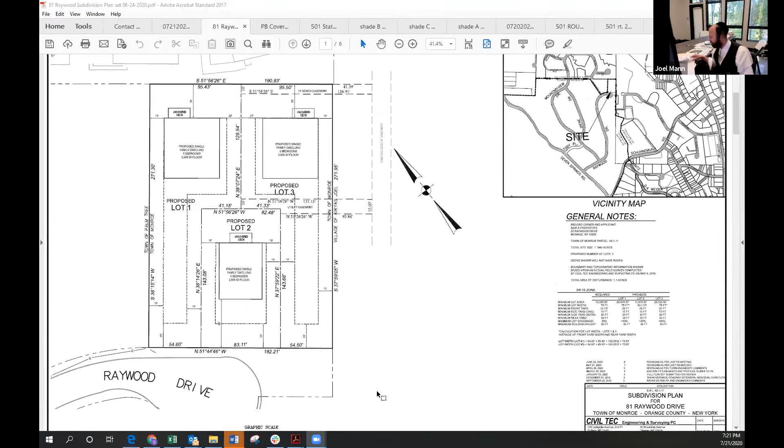Okay, so basically at the last meeting the board scheduled a public hearing for this project, and we had a couple of items, basically subject to addressing the comments from the planning board, and we did that. We resubmitted a set of plans, and they were more like technical comments, simple comments. We just received a couple days ago a new comment letter from Sean. I didn't have a chance to review that, and it's basically also regarding the easements that we are working to get. The Orange County Sewer District number 1 application has been submitted, and as soon as we get something... I actually had a meeting last week with the sewer department, they are working now on it, so we hope to get back from them something, comments or approval, soon. And that's basically it.

So why don't we just take one quick step back, Joel, and explain again what this subdivision is, how many units, where it's located, for the benefit of anybody who may be listening in for the public hearing. Okay, sure.

So this property is located on the end of the cul-de-sac of Raywood Drive. We're proposing a 3-lot subdivision. All 3 lots are compliant with the bulk table, and the proposal is to build a single-family home on each lot. In the last couple of months we went through with the planning board and did more or less a completed set of plans, including grading and utilities, and there was a lot of discussion about the trees. There's actually a letter from the Conservation Committee we'll probably need to address. So we're here basically for the public hearing to address any concerns from the public.

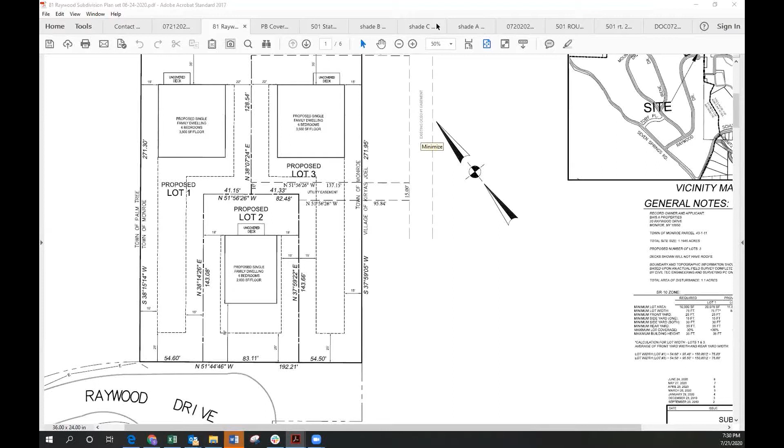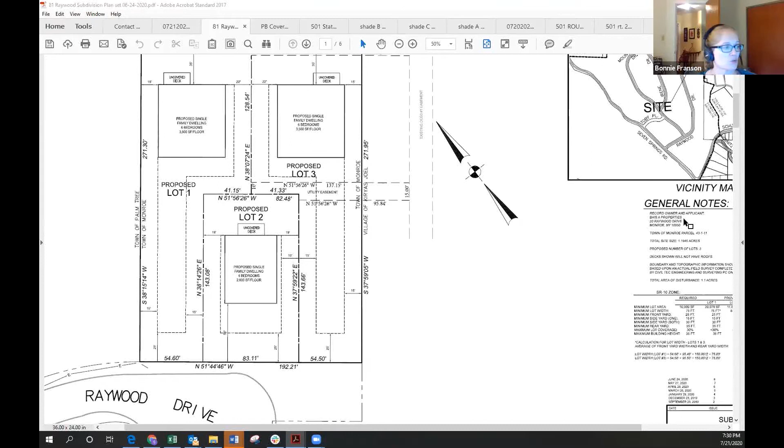So what I was saying is that in 57-21.8C, there is a section that says house relocation and standard notes are to be placed on every site plan or subdivision approved by the planning board. It includes notes that specifically state the maximum number of bedrooms is not exceeded, the maximum building footprint is not exceeded. So in terms of how many bedrooms, it's specified in the house relocation notes. Your comment went beyond that to question how many people would be within the dwelling. But at a minimum, the applicant is required to disclose how many bedrooms, on which to some extent the population is based. And that is on the plan.

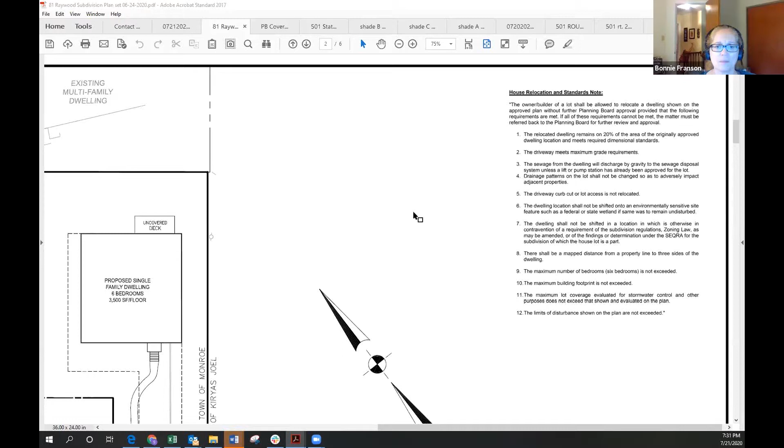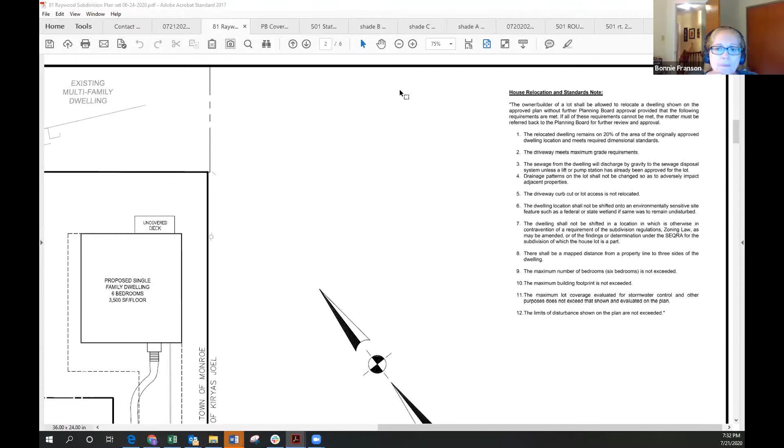So I don't know that there are any other individuals who want to make comments. Those were our two phone call-in listeners. Board members, do you have any questions with regard to the plan and what is shown? Any comments?

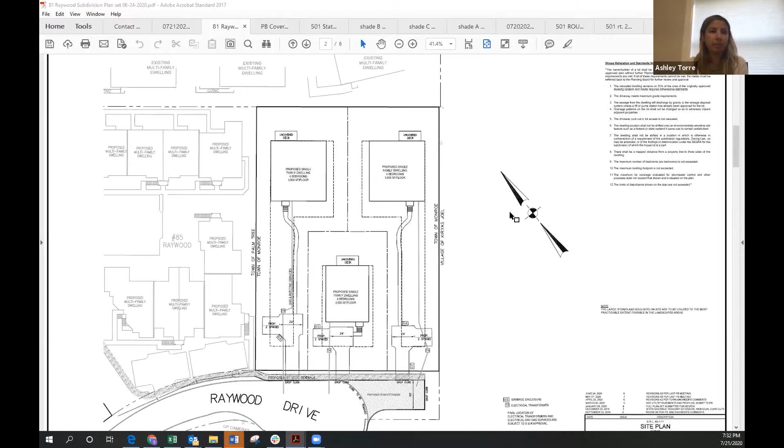Bonnie, would this be a time to comment about the Conservation Committee report? Ashley, do you want to do that as part of the public hearing or outside of it? Whichever you prefer. If you want to do it during the public hearing in the event you want additional information or further input, then you could do it that way. Okay, so John, did you have comments on that report? Yeah,

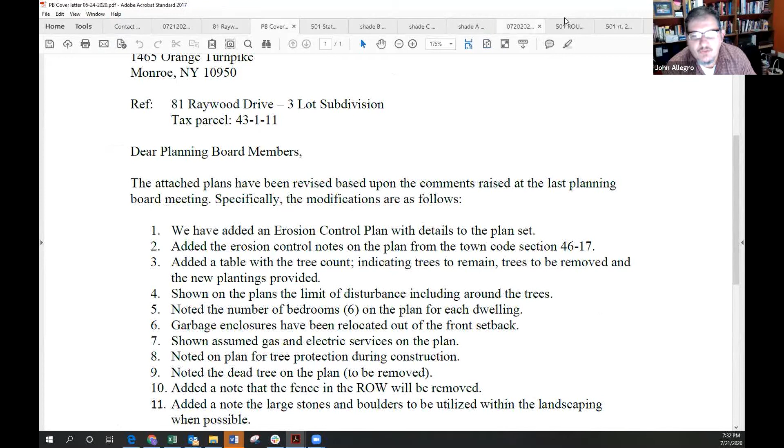I understand the statement about white pine trees, which were proposed as replacement trees or screen trees. I understand that they are high maintenance and can be rather fragile in wind and snow conditions. The only question I had was the recommendation to replace those screen trees with arborvitaes. They can end up getting destroyed by deer in no time. So maybe if there's another alternative evergreen tree that doesn't necessarily have to grow so quickly, but wouldn't be deer food - something that's deer resistant.

Ward, are you still on? I'm back, I think I'm back on. As far as the trees, the deer are a problem. I agree with John, they're a problem with white pine. They're a problem with practically every tree in existence. The thing is, you take advantage of the topography on this. This is on a slope, so deer can only reach up about 6 feet and eat. They can jump 10 or 12 feet, but they can't eat while jumping. So on a slope like that, even if you lose 5 feet of coverage, you won't see it - your tree will grow up. It's less maintenance. With white pines, what happens is they grow 6 feet a year. If you don't prune them once a year, in about 10 years the bottom branches will thin out, and people will cut them off anyway because they protrude out about 30 or 40 feet from the base. So that's not going to work.

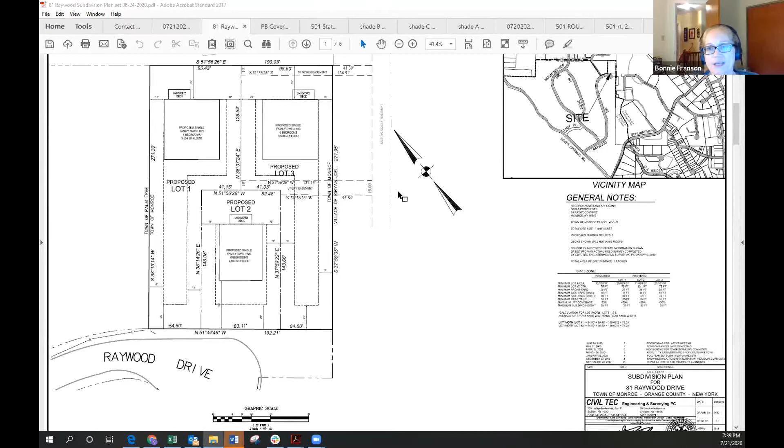It is interesting that in some forests you don't see a lot of deer foliage damage because there's enough other food mast. Correct — Bonnie, you hit the nail on the head. A lot of these trees are not the deer's first preference, but when there's nothing else around, they'll eat them.

The main thing is you can take advantage of the topo on this site. The site drops off dramatically, so the part the deer do eat, you won't even notice it, because the trees will get up there and perform their screening capabilities and you'll be fine.

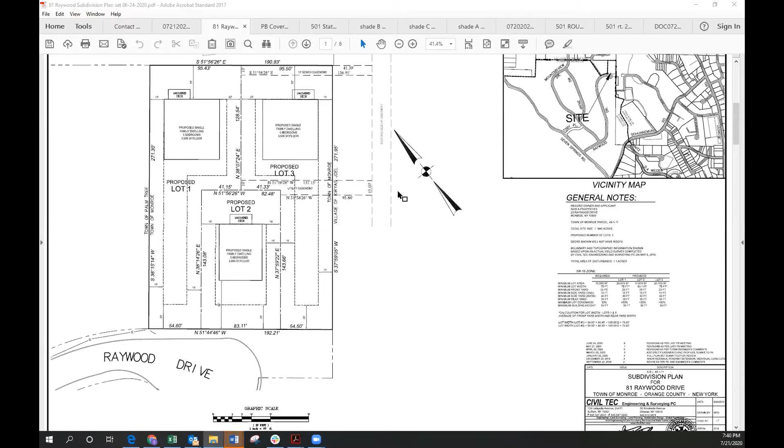So we'll take a look at your comments. I think we had also talked about possibly putting some trees at the end of Raywood Drive. Yes, I saw that in the note. Right, so where the turnaround is, that they put something there. So we'll consider your plantings.

Okay, thank you. These are the white plains — white pines. Yeah, I'd stay away from them.

They get too big. We had a project, a walk about six months ago. A new homeowner came in and bought this house, and he had 10 or 12 white pines planted 30, 40 years ago. They had taken over the entire backyard. He couldn't do anything, so he went in and had them removed, and then he got called in on the tree ordinance, so we had to go in and make recommendations. Again, these trees — if you don't maintain them once a year, and white pines, forget it.

Okay, so thank you, Ward. Bonnie, I want to stress one other thing.

In our report, we mentioned the galvanized wire used for staking those trees. I'd love to have a dollar for every tree I've seen this happen to. Planters stake the trees and wrap wire around them, then forget to remove it. They're supposed to remove the wire within a year, because if the trees haven't established themselves by then, you need to revisit the planting anyway. But they don't remove it, the tree expands, the bark grows over the wire, and then 10 or 20 years down the road a windstorm comes and the tree snaps off. That's why you should use biodegradable rope instead, because nature takes care of it within a year and the problem is solved.

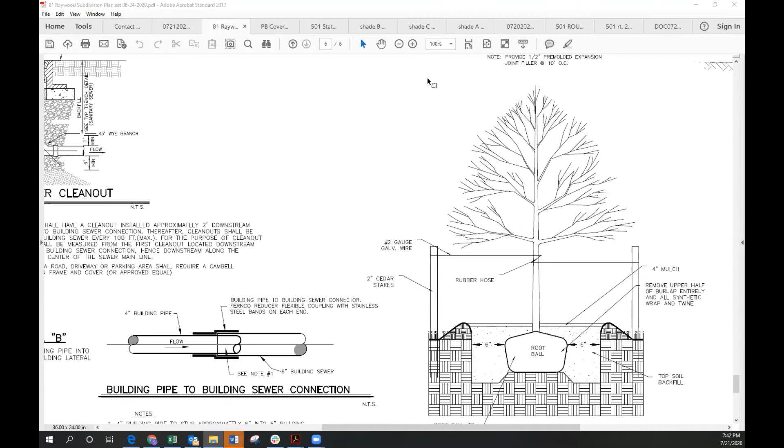Can the inspection fees for the subdivision include a requirement that someone go out a year from now to look at the plants? I'd have to look at your code. I'm pretty sure the tree law speaks about fees, though I don't know if it specifically covers inspection fees, but you do have general subdivision inspection fees. So we could look at whether you could include something like a bond that covers tree plantings and maintenance, so that someone can go out, inspect, and ensure the conditions and site details are actually followed.

Yeah, I think you'd be able to structure something like that as a condition. Okay.

So board members, do you all agree the applicant should look at the Conservation Commission's comments and take them into consideration in developing the landscaping plan? Yes, yes, I agree, yes. All right, thank you. Does anybody else from the board have comments?

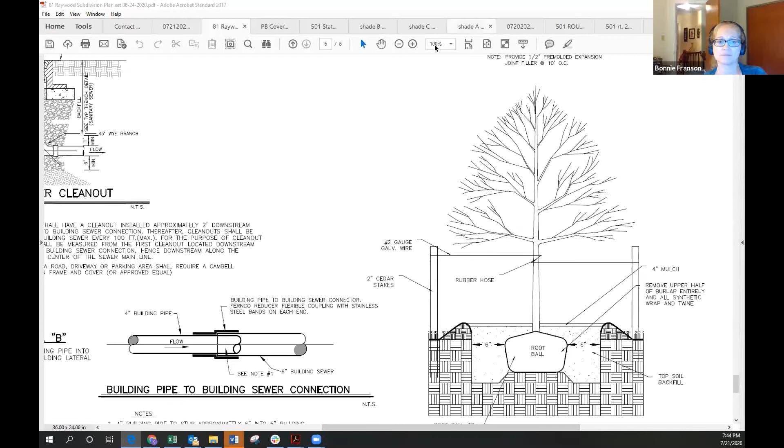I have a couple. In relation to the Conservation Committee's recommendation on tree screening, those same type of trees were used on a project in

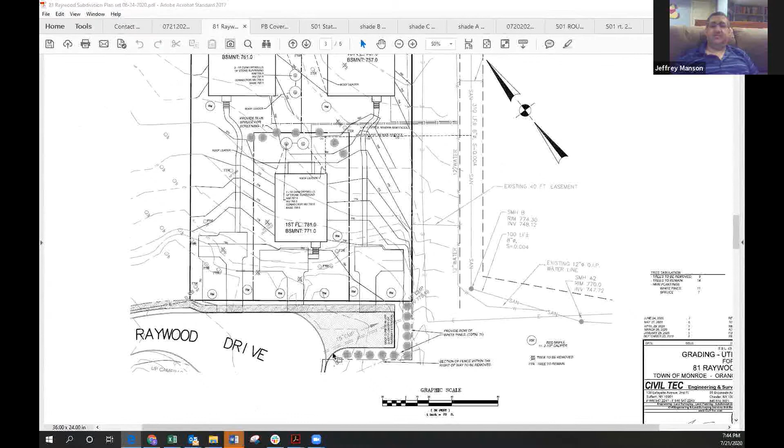the village of Harriman, where the memorial park is, right where Church Street and South Main come together in the middle of the village. There was no good screening behind that, and some trees had been taken out. The recommendation we're hearing tonight was actually what the nursery recommended in that case, done about 3 years ago. I drove by and looked at it yesterday, and it's come in terrific, doing exactly the job they were looking for. I think it would do well here too, as Ward and the Conservation Committee have recommended.

I had a chance to go out finally and take a look at the property. I noted the same thing with the large rocks, particularly at the top of the property up by Raywood Drive. One thing I wanted to recommend: where the driveway comes in on lot number 3, there are quite a few large boulders. If the applicant takes a look at 47 Raywood just up the street, they used a number of boulders that were on that property to do some interesting things, and it looks really good.

Another thought: near those boulders by the driveway, there's a big, almost cubical-shaped flat-top boulder right where the driveway is going to be. It would be nice if that could be arranged with the 3 large trees on the tree plan just southwest, or actually just due west, of the driveway, making a nice little area. It looks like someone had set up temporary seating using some stumps there, and it would be nice to preserve that and make a small seating area in that little grove of trees for future residents to enjoy, taking advantage of what's already there to do some nice landscaping on the project.

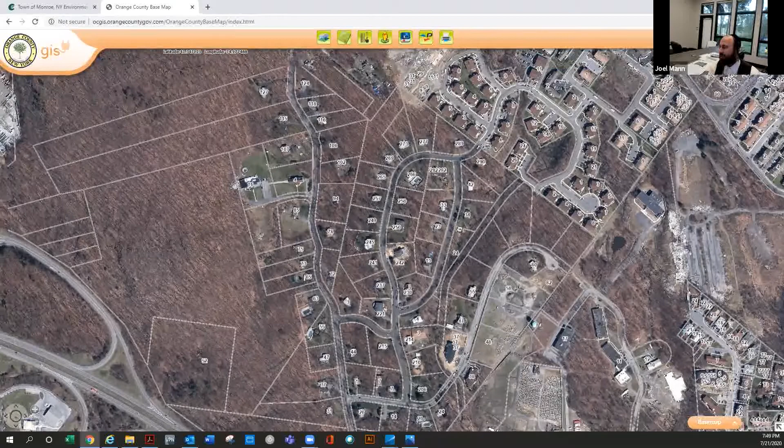So can we see this? Can you see that? Okay, it's coming up now. Yeah, I can see it. Okay, so you can see the property at the end of the cul-de-sac?

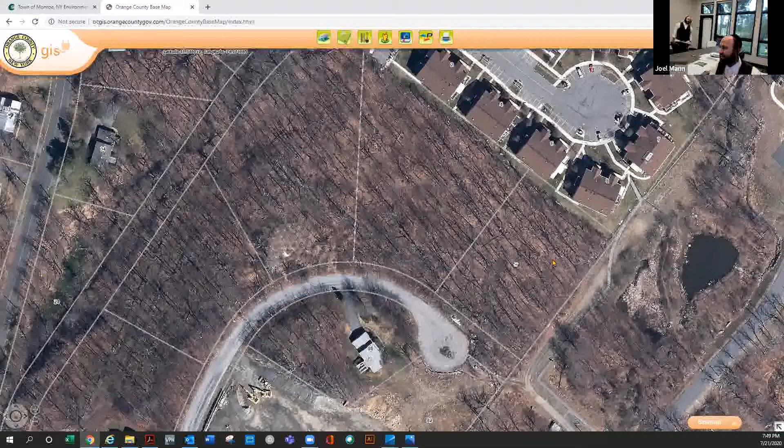We're right here, correct? Yes, and in fact there's development happening here that you can't see. And the pond is basically, if you go more to the right side, you can see it there. So basically all the water is draining down in that direction.

Oh, it's more updated. I'm going to see if Google has it more updated in the maps. It should be more updated.

There you go, so you can see some grading happening here. This building is new. I think some of this is new, and this is our site.

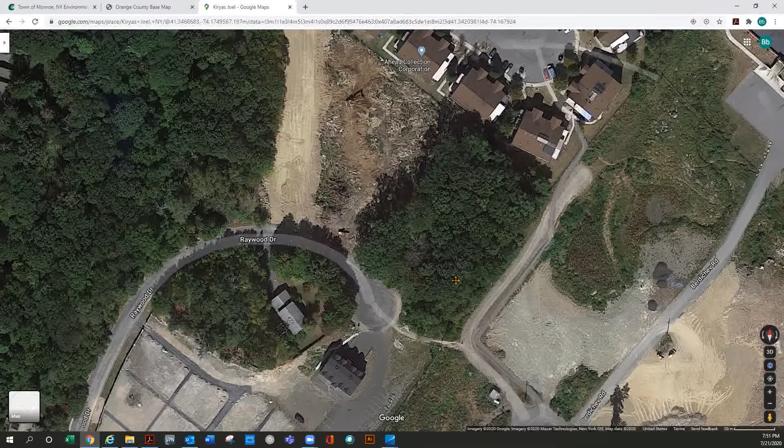Okay, I did want to show you these are the rocks I believe you were talking about, Jeff, some of the ones in the front, and they're bigger ones. Right, those are just some. We noted that it's a little hard to tell what's natural and what might have been placed there from other activities, because there's a mix of rock that almost looks like there was some blasting and they threw it there, while other rocks do look as if they're natural.

So it's kind of hard, but it would be nice to integrate that into the design. So the question is, do you want to see it specifically on the site plan, or just a note that we should implement that into the design?

Well, I think we need to be clear on the map of what can remain natural. Is the entire site being graded? If so, the rocks obviously have to be moved, and then it's a matter of showing us where you might place them, how you might locate them. It doesn't have to be a specific design, but maybe showing with notes and areas where you would place some of that natural material.

And again, if there's any trees to be preserved at all, I thought the map was showing some. Sean? You're muted. Yeah, there are some.

These trees that are labeled TTR, tree to remain, are ones that are to remain. And I believe there's a note, I can't recall where it was, about trying to utilize some of the rocks as landscaping. Right here.

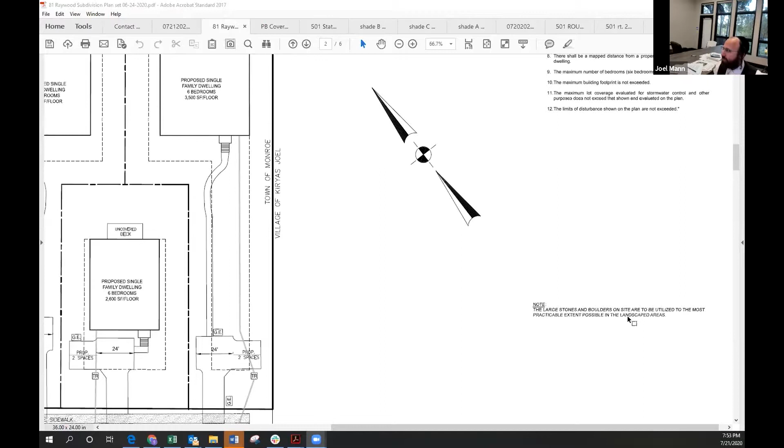Yes. So I guess then, if the board wanted something more specific or to see something visually in a landscape plan of how they'd be used, now would be the time to talk about that. Yeah, and it may be that they just call it out, perhaps on the landscape plan, where they might be able to retain some of those materials, blobby areas just showing generally where that could happen.

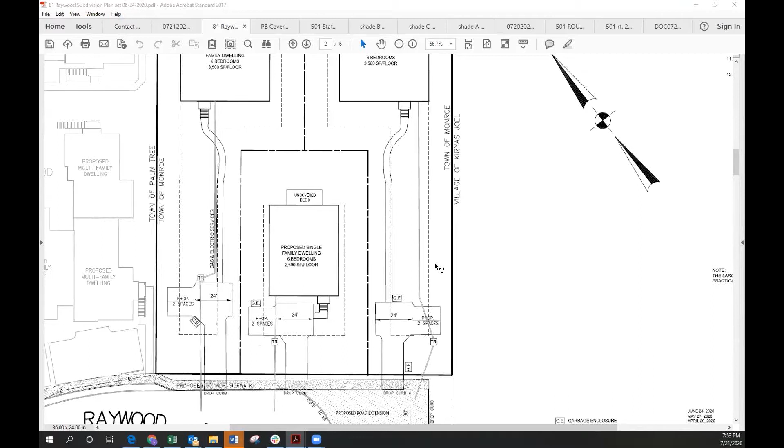Okay, I will show on sheet 2 or 3 the areas that we think we can keep as those areas.

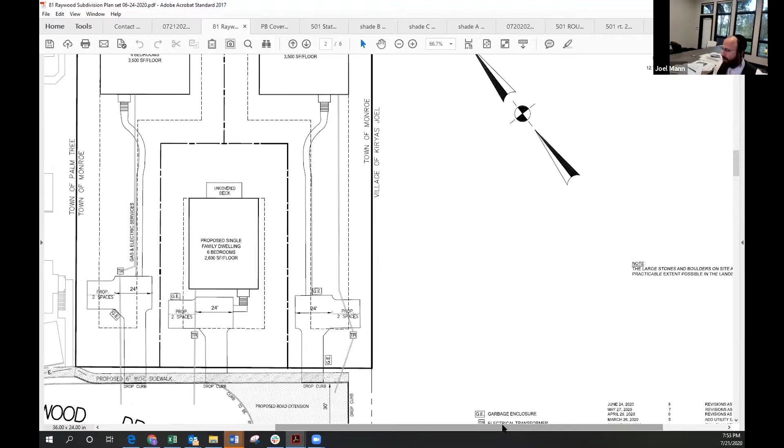No problem. I want to go back one second to Jeff's question about the drainage. So basically, we saw the surroundings, and the second thing is this property is over an acre, and the engineer provided a SWPPP, and we have on-site detention. There is a couple pits on each property, basically taking in the additional impervious areas.

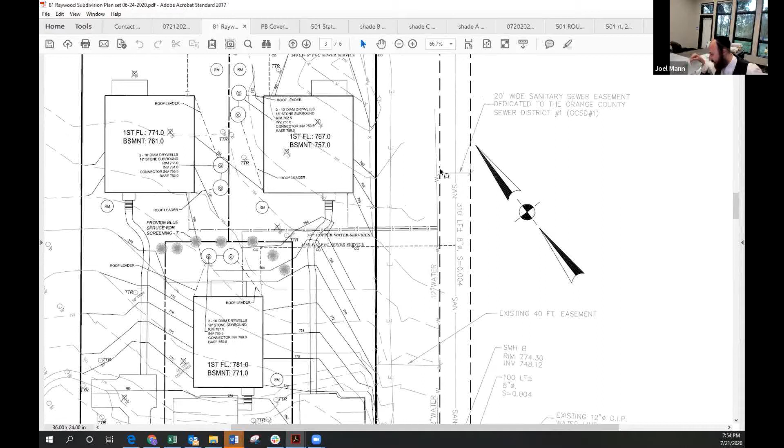I have a question, Joel. What kind of pit is it on the property? I see it says roof leader. Sorry, it's dry wells, wherever it's dry wells, there is. Oh, so they're underground dry wells. Yeah, okay, thank you.

Anybody else have questions? Sean, do you want to go through some of your comments?

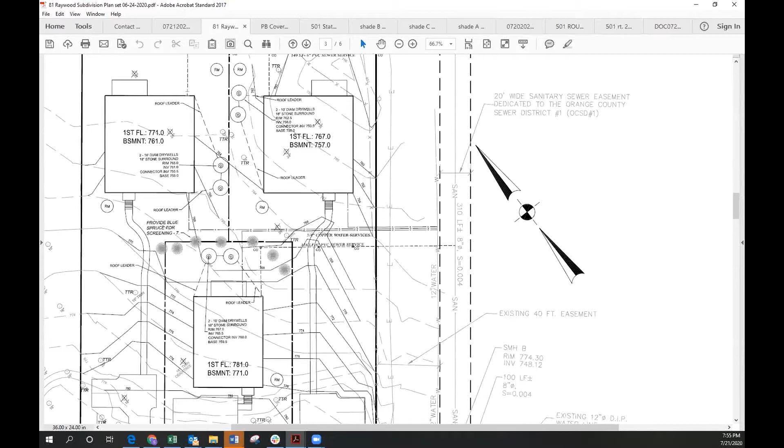Bonnie, yes, Noreen, I just sent you a text. I don't know whether you want to see if I should ask the question. No, I'm looking it up myself, but okay.

I'll raise it now. Joel, you make reference to this property being 81 Raywood Drive. But if we look at the property, it's 81. The SBL, when we look it up online as far as the property information, there doesn't appear to be a number assigned to it. Right, actually I just recently noted that, and I'm not sure from where I got this number. I believe I did it because across the street is 80 or something like that. I think it's just, I don't know that we changed the application name at this point, but it doesn't appear to have a number yet assigned to it for 911 purposes.

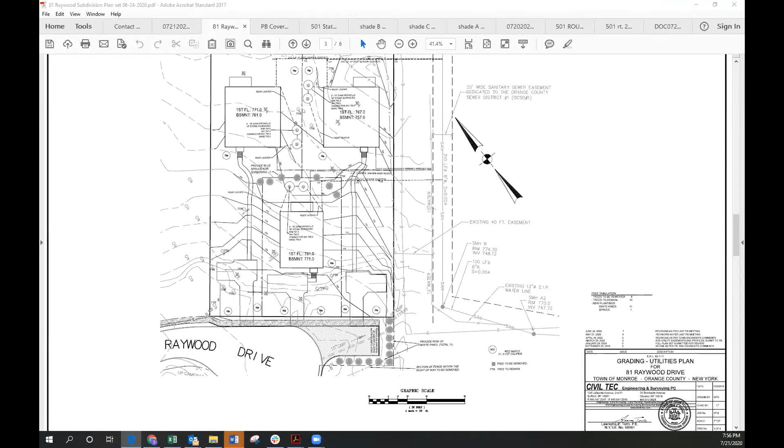Do you want me to change the application and the plans, basically all the cover sheets, whatever, all the title blocks? It should just say Raywood Drive without the address, correct?

Ashley, what are your thoughts? Are there any? Yeah, I think that makes sense because I think it'd be confusing if the 81 is kept on there if it's not actually the address for the property. Okay, that shouldn't be a big deal. We'll take care of that. Very good.

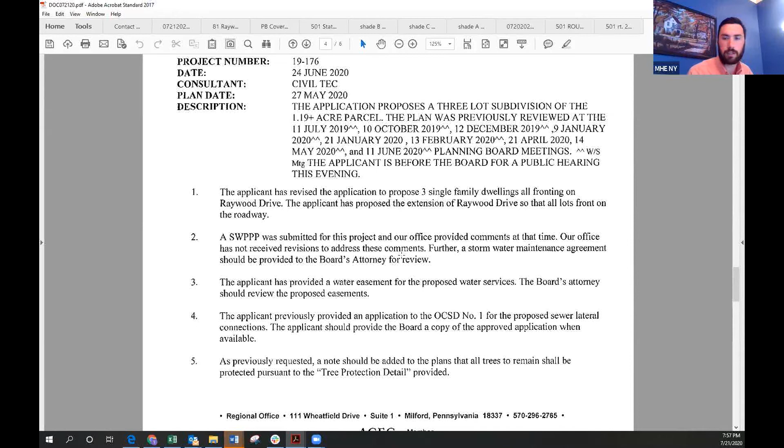Okay, Sean? A lot of these are same comments as before, such as the water easements and the sewer laterals, just kind of reminders for any potential conditional approval. One thing, we did provide the SWPPP comments. I didn't see a revised SWPPP, but that'll have to be addressed prior to stamping of the plans.

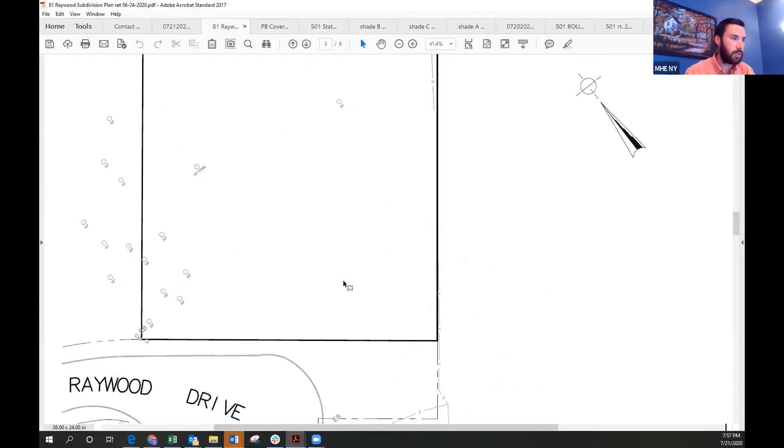Previously I had suggested that a note be added to the plans that whatever trees are going to remain be labeled to be protected, for the detail that was provided right here, the tree protection detail, just to be able to tie the detail to the locations on the plans.

Previously the highway superintendent had requested both the chain link fence be removed that's located within the right-of-way. I did see a note to that effect. However he also requested that a note be added that the street trees proposed within the right-of-way be maintained by the homeowners. I didn't see that note.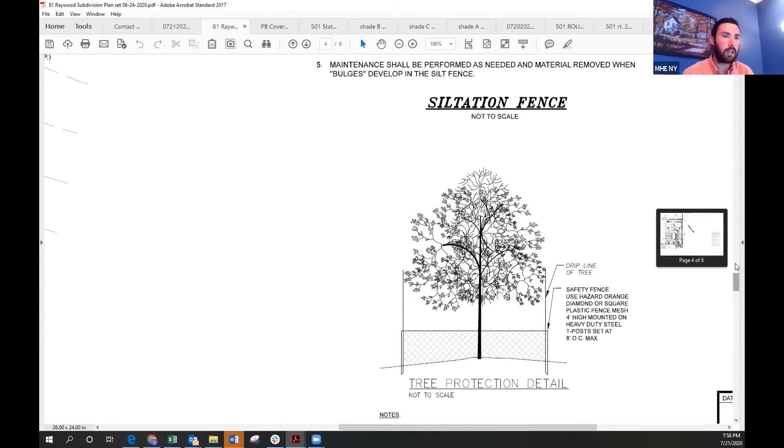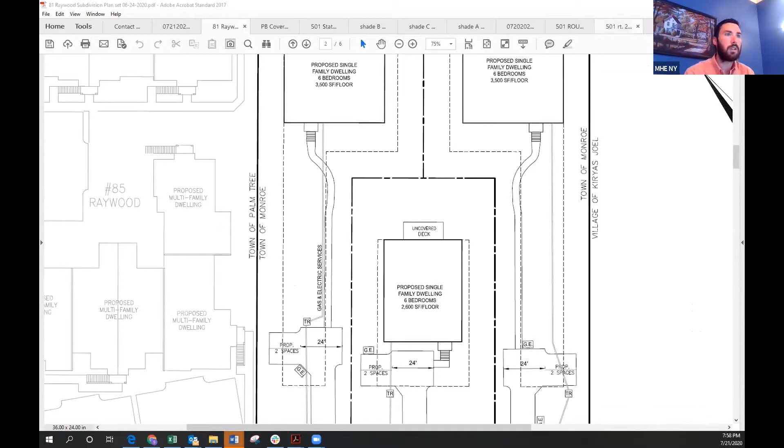Number 7, I think it was brought to the attention by one of the board members that the utility lines, the gas and the electric, try to keep those as close to the proposed sidewalks as possible, especially for lots 1 and 3, to try to eliminate the disturbance and trenching to each of the houses. I see they did a good job doing that for lot number 1. I suggested that lot number 3 could maybe be a little bit closer. And we already talked about the comments by the Monroe's Conservation Commission. That's all I have.

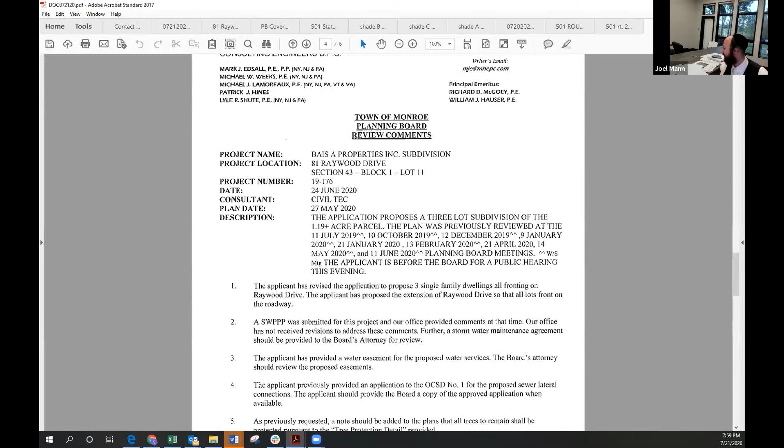Okay, thank you. I have a question regarding comment number 6. On this plan, the way the subdivision has been proposed, there's no plan to do any homeowner association. So the question is, should we do just a homeowner association just to maintain the trees in this area, or is there any other way to put responsibility on the lot owners?

All the lots are self-maintained. The drainage is, everyone has the self-drainage. They have the sewer, the water lines, everything is separate. The driveways, so there's no common usage on these 3 lots.

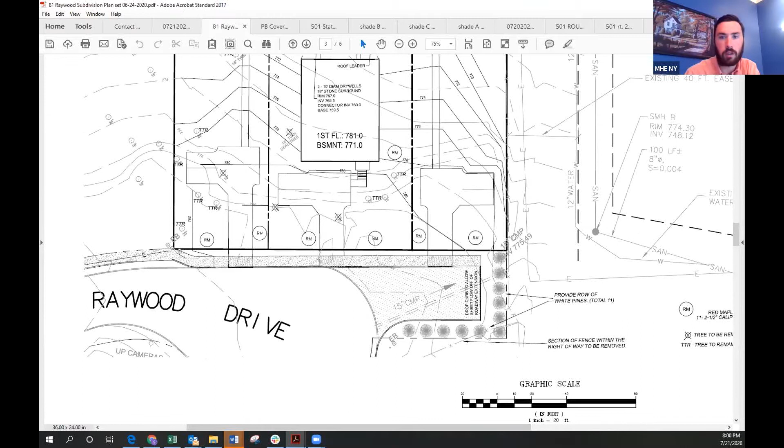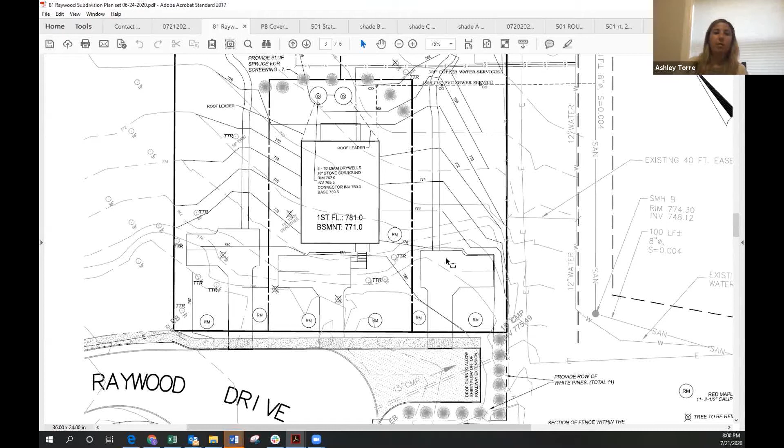Yeah, I'm not sure, maybe Ashley would know better, if that can simply just be a note on the plan. Does there need to be a homeowners association to maintain those trees? There doesn't have to be a homeowners association, but it would have to be, and I'll have to think about the best way to really accomplish that, but either through some sort of deed restriction and some kind of agreement that would be filed with the county, maybe that would cover these 3, if it wasn't going to be just on one person, which really depends. It might be easier, as far as the town's purposes, to make just one person responsible, and then however the 3 lots want to work it out amongst them, if they're going to share the responsibility, that's up to them. But for the planning board's purposes, I think it would just be a requirement that's enforceable to make sure those trees are maintained by at least one of the homeowners. Ashley, could they be tied to the stormwater maintenance agreement somehow?

So there's going to be a stormwater maintenance agreement. Is it going to cover the entire site? Each lot, I was going to actually ask about that. Were we going to have a district? We were going to have dry wells on each lot, so they would be maintained by the homeowner.

Would your stormwater maintenance agreement be something between the homeowners, or just something that allowed the town to come in if there was a problem with maintenance? Since each of the dry wells are on the respective lots and only treating each individual lot, in my opinion each lot can maintain their own. I'm not sure if a standard agreement would include the town being able to get on site to maintain it if it wasn't maintained.

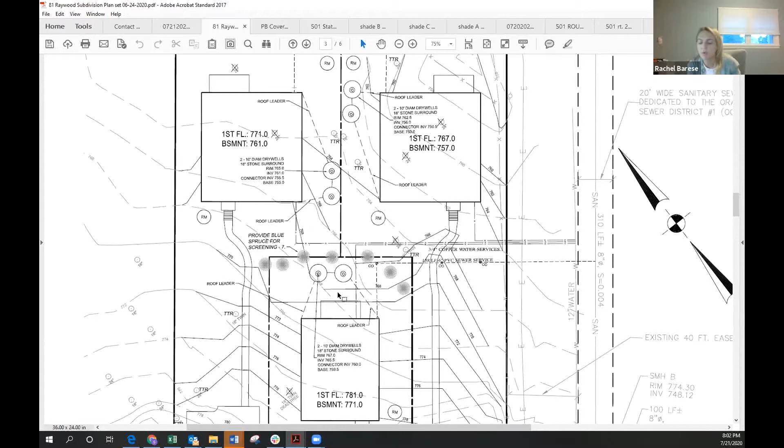Okay, because I just didn't know what kind of agreement you were looking for, since it's not going to be between the lots. So typically it would — I don't know if Bonnie knows whether Monroe has a form agreement or something, but I know typically the municipality will have that right, but not the obligation to go in and maintain stormwater.

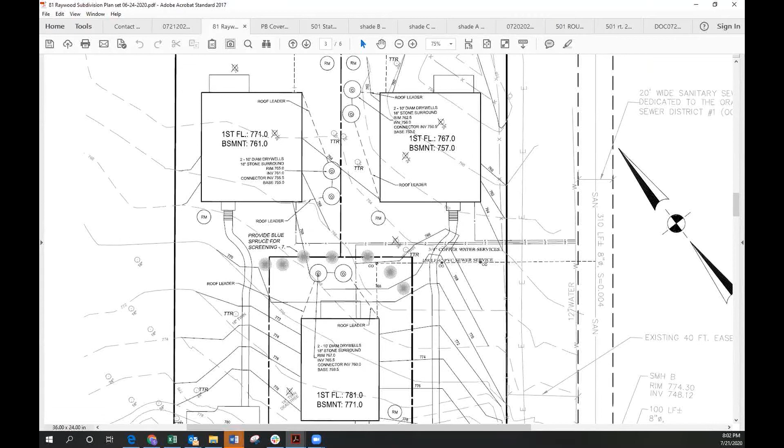That's what I've seen in other places. I would check — I was wondering, since the town does create drainage districts, whether in as much as it's a small subdivision they would want to create a district for this or not.

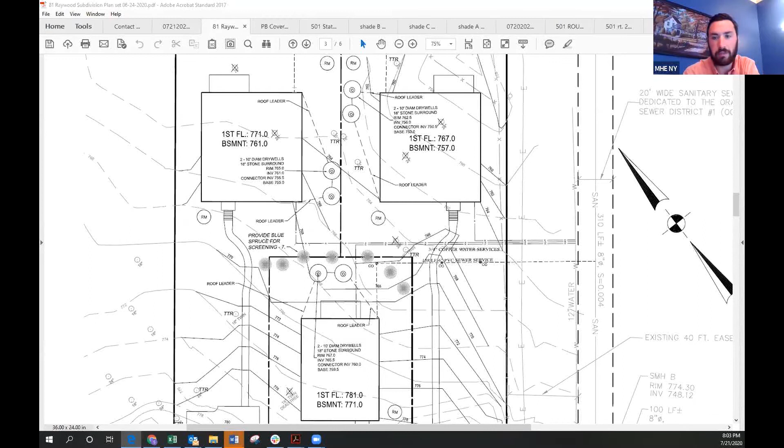I would suggest against it since there's no shared treatment or storage. Each of the individual lots are serviced by their own dry wells, so I don't think it would be in the town's benefit to create a district for each one of those. So then it would be up to some kind of stormwater maintenance agreement, but we'd have to find out if the town wants to be able to enforce the agreement.

If there's an issue and something has to be cleaned out or maintained, or have the right to access the property in the event that they're not maintained and there's an issue with them — I think we have to ask the board that question. So that's something to follow up with. Maybe Sean, perhaps you can speak to the highway superintendent?

Sure, and he may have some insight as to what they've done for some of the smaller subdivisions in the past, although he's newer too, so ultimately we may have to go back to the town board. Yeah, I'll also ask Mark how it's been done in the past.

Okay, how far have we gotten with Eagle View? What's our setup there on Lakes Road, from a stormwater maintenance perspective? Off the top of my head, I don't recall. Okay, I was going to say that might be one to consider, but okay, we'll follow up.

Any other questions? Jeff? Comments? I'm good. You're good? Anybody else? Pat or Lisa or Jason or John? You're good? I'm good. All good. Nope, alright.

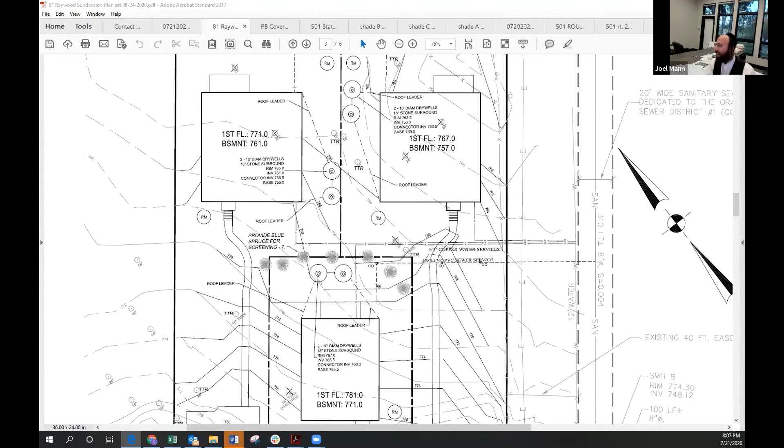I think let's close the public hearing next month, and together with that we'll basically approve it. Anyway, I guess you'll keep the public hearing open to get these additional comments and information. Is that fair to say, Ashley? I think so. I did have a couple of comments too, I could go over quickly.

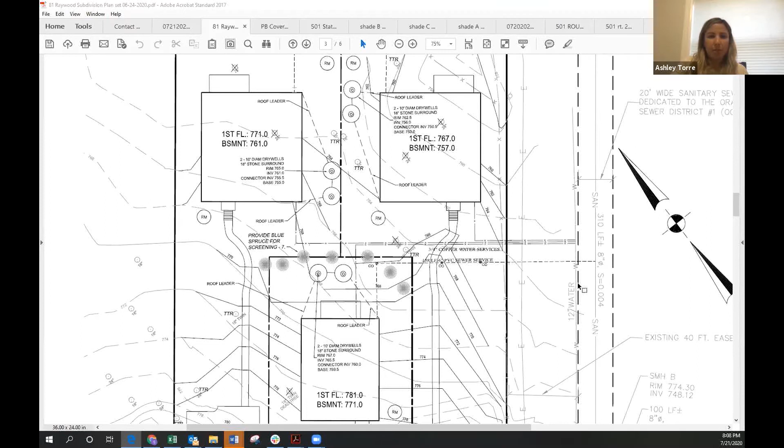Sean, if you have sheet number 2 up there. On lot number 3, it still shows the garbage enclosure in the setback. It shows one of them's been moved back, but I think it left in error, the one also in the front. For lot number 2, if you could give the distance from the side yard lot line between the side yard and the garbage enclosure, because it can't be less than 5 feet, just to confirm that.

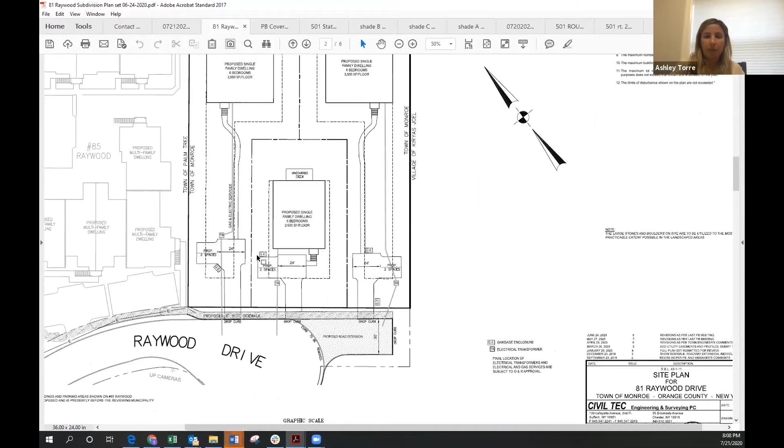The soil erosion and sediment control notes on drawing number 4 were missing some of the notes from section 4617B. You were specifically missing sub 5 through sub 7.

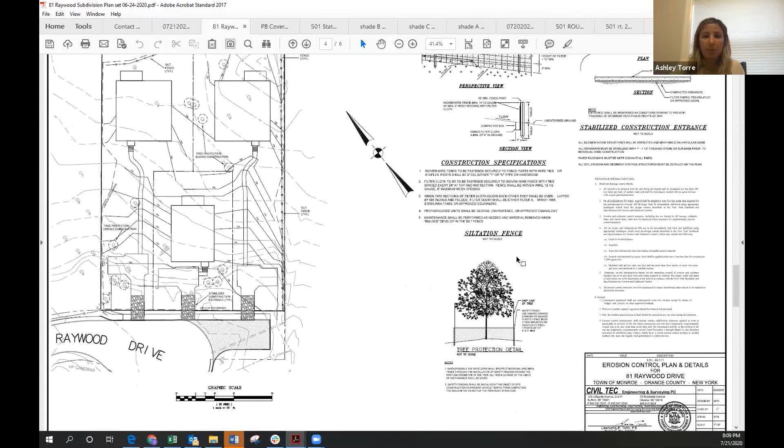We talked about the trees. One of the things I noted, the tree protection detail states it should be a requirement, but it states 'when possible.' That should really be a requirement, not just when possible, so they'll have to abide by that tree protection note.

You're proposing to remove 8 trees and add 7, plus the trees along Raywood Drive. The tree law requires trees to be replaced on a 1-to-1 basis, or on a basis acceptable to the planning board, so we just want to make sure the planning board is agreeable to what's proposed, removing 8 and replacing 7.

The planning board will also need to discuss public improvements and whether they're required or waived, and there's a list of them in the subdivision regulations. You will also need to address recreation fees since it's new residential units. And I think we talked a little already about the tree bonding—those notes will have to be added once that's all figured out.

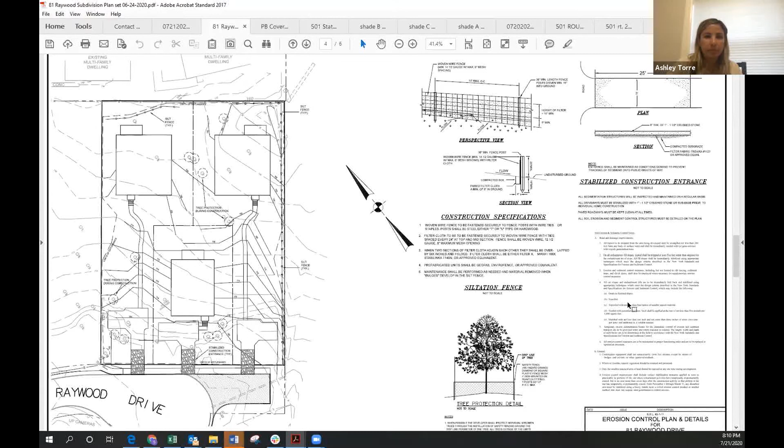Okay, is that it, Ashley? Yes, that's it. Anybody else?

No? Okay, so we're going to extend this public hearing to our regular meeting in August. And Joel, if you can follow up with the revisions, and we'll continue to move forward in the process.

Ashley, do we have to renotice, or what do we have to do to continue the public hearing? You don't need to renotice since you're announcing it at this meeting, and this meeting was noticed. Okay, do I need to pass a resolution to continue it, or do we just continue it? You could ask the board for a motion to make sure everyone's agreeable, or instead close it.

It's just a motion to continue the public hearing to the August meeting date. So I make a motion that the planning board extend this public hearing to August, is it the 18th, Noreen? Yes, it is—to the August 18th planning board meeting. May I have a second? So moved. Noreen? Was that Pat? That was Pat, thank you.

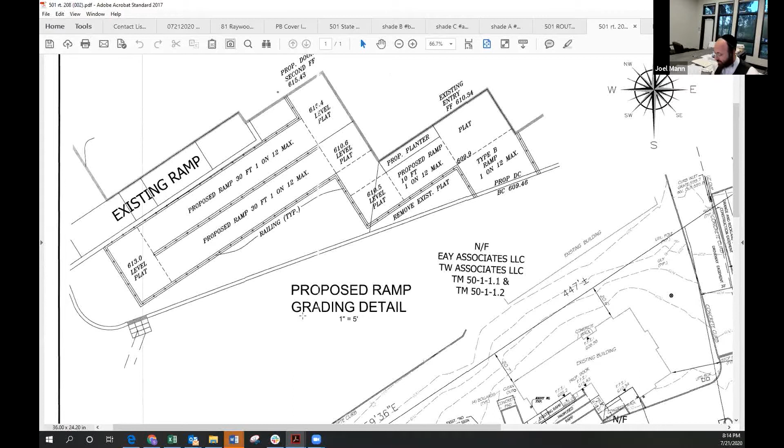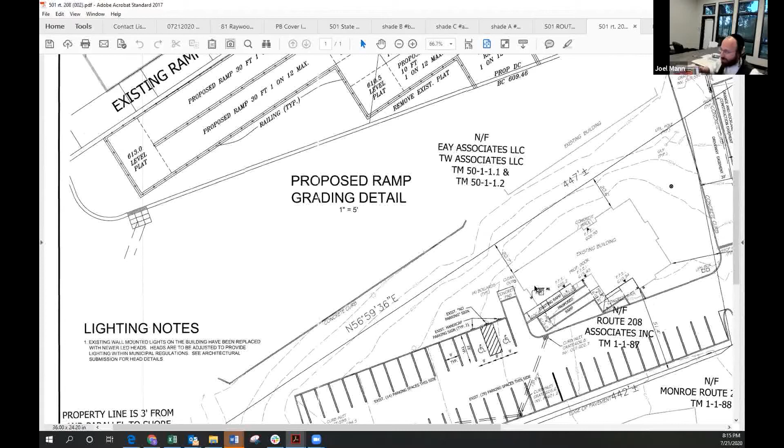Maybe they don't like all 3, and that's the reason I'm supposed to have the designer here, because they can explain better than me the impact from the colors and understand the board's concern, but obviously they're not here. You can see in the first picture...

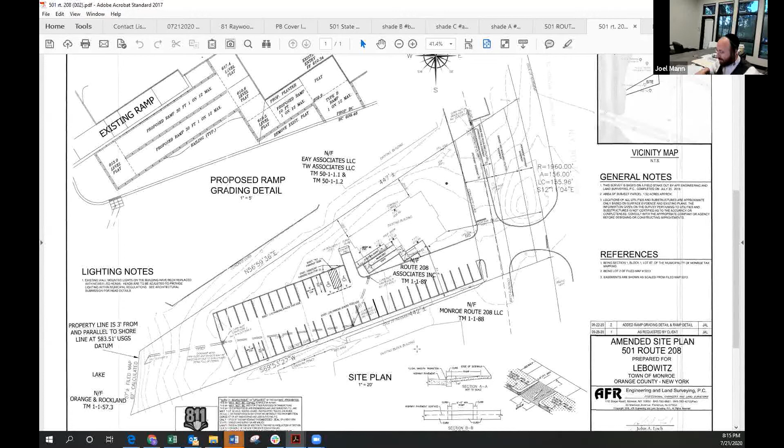We reduced the height of the sign significantly. Basically one of the zoning codes is that the height of the sign cannot be higher than any point of the height of the building. So we measured the highest point of the building.

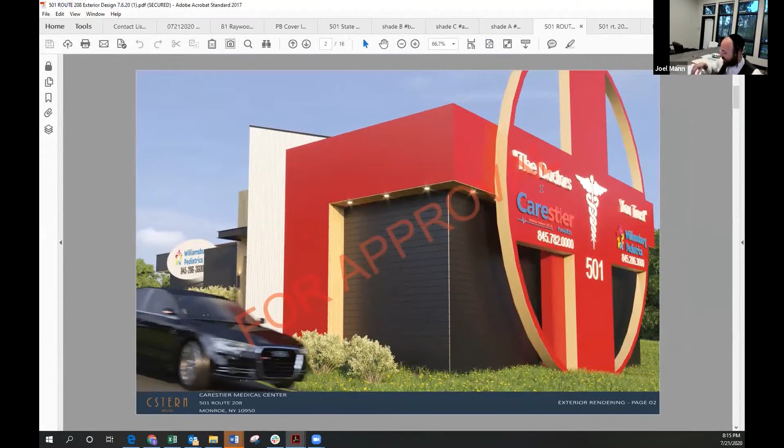There are dimensions on sheet, on page 08, yes. So basically you can see that the height is 26.6, and the same thing when you look on page 7, if you go back one page, just to show which one I match. You can see the top of the white picture. It's not reflecting correctly here with the red line, but the height of the white portion of the building is actually 26.6. So that's basically the highest point of the building, which was matched with the front sign.

Going back to page number 3. So basically we changed the front look. You can see the ramp, everything matches now. The ramp was extended all the way to the front entrance. We changed the door entering the building to be on top of the ramp. It's now turned to the front - in the last picture it was sideways - but we changed it due to not having enough space for a handicap landing on the side.

Going to the next page, page 4. I understand the board had a concern about the sign being on the top portion of the building. We looked it over, and the concern was that it cannot be higher than the roof, but according to the zoning, this is in compliance. Now if the board still has an issue with it, that was the reason I'm supposed to have the designer here, to discuss this and address the board's concern. So certainly the board should raise the concern and I will try my best.

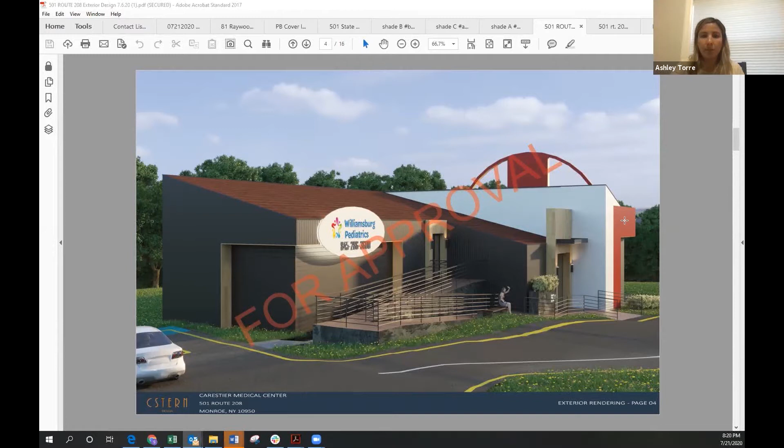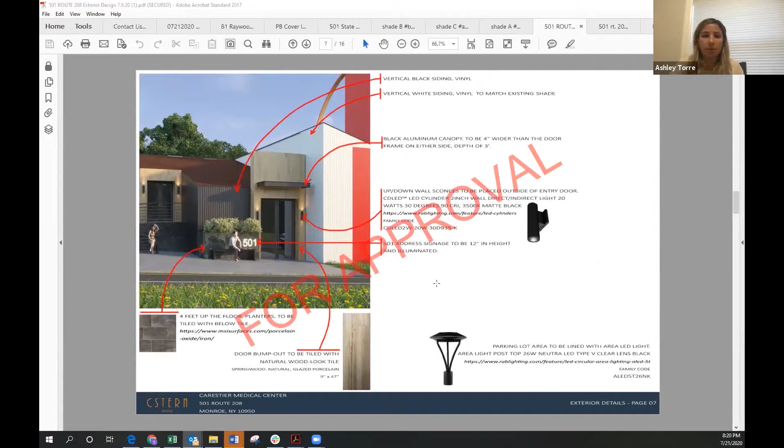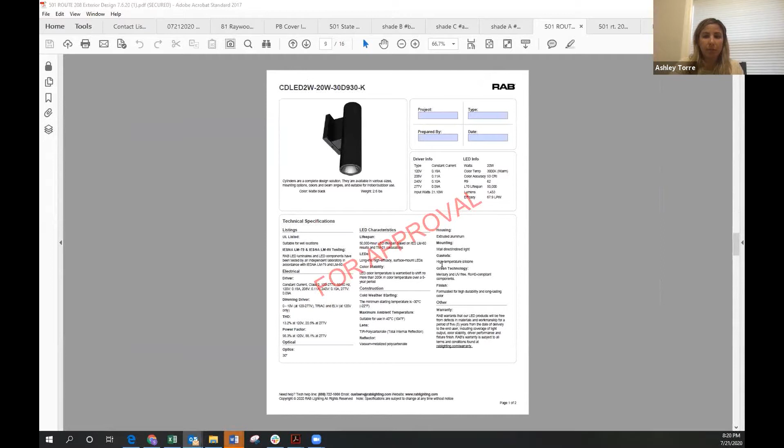So I'm a little confused by that because that ring seems to definitely exceed, unless maybe it's not to scale or the perspective is off. It seems to me that it does exceed that, so that would need to be revised. One of the lighting specs for the parking lot fixtures exceeds the 2500 to 3000 Kelvin previously recommended by Sean. But again, it was really that issue with the size of the sign, the 2 square feet for each 1 foot width, and also the height of the sign.

Okay. The height of the sign, I did this rendering. I don't know how proportionate it is, but the height, as mentioned here, is 26 feet and 6 inches, and this is the same measurement as the highest point of the building as we actually measured physically on the site. It's probably that the rendering is in perspective, not fully updated, but we will look into that and get back to you on this.

Joel, I think there's still an issue on the sign since, based on the dimensions provided, it does exceed the maximum allowable on this side of the building.

Just to clarify one thing, is the square footage of the sign counting the whole array, the full everything in the round, or just the piece of material? Because we have 4 empty areas, the 4 corners. I measured just the cross. I did not include the sections of the ring, and just the cross exceeded the square footage. So the whole cross is being considered as a sign, is that correct? I would say that it is.

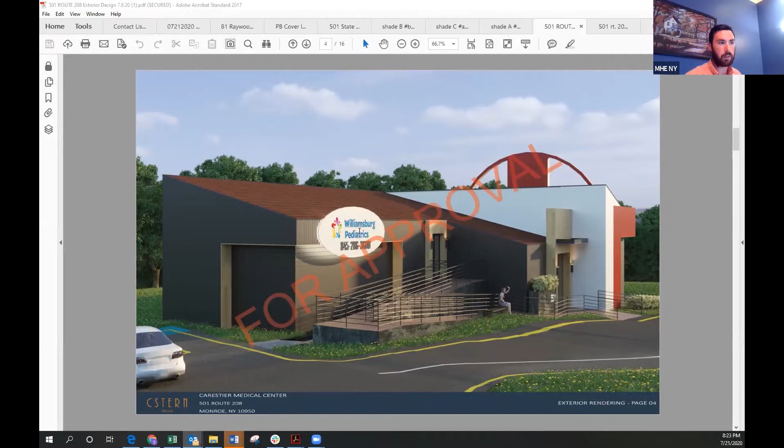So basically we are counting the whole perimeter of the building, and based on that we have 2 square feet for each linear foot of building. No, when I talked to Ben this afternoon, his interpretation of how the code reads is, for example, this section of the wall, the measurement from this corner to this inside corner would be the linear foot of that facade that counts for this sign. Similarly, for this sign, it would be from this outside corner to this outside corner. Okay, we'll look into that.

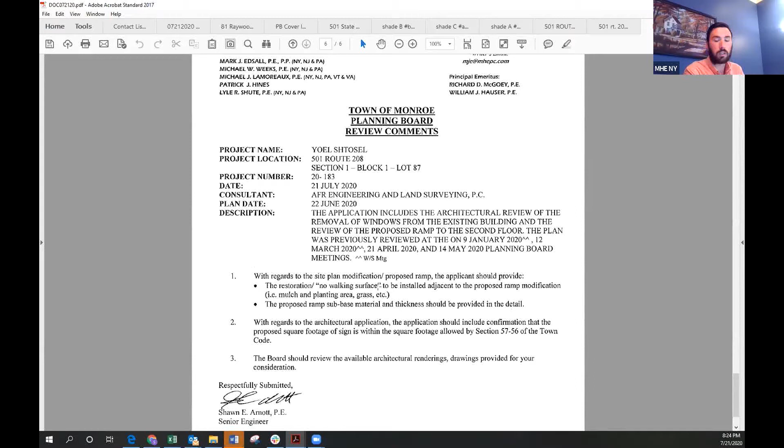I just had 2 other minor notes on the site plan, very technical and minor, about labeling what the restoration will be around the ramp, whether that's a landscaped island or grass or whatever - it just wasn't clear on the plan. And then just noting what the sub base for the sidewalk would be so that it's constructible. Okay, we will have AFR update the site plan and provide that.

So basically on the site plan, besides these 2 comments - the sub base for the sidewalk and noting what is left - you want to see a note on the plan for what is between the ramp and the curb. Essentially, yes. Okay, then based on that, the site plans should be good to go.

So here's the question again, raised a while ago before I was in this application. Now that you have a site plan with just 2 technical comments that can be conditions, the question is whether there's an option for the board to approve the ramp and deal with the signs later, since the signs might take one or two more meetings until the board is satisfied. The ramp is very important and they want to move on with that. They still need to go for a building permit once the ramp is done. So the question is whether the board would like to consider voting only on the ramp and not on the finished materials.

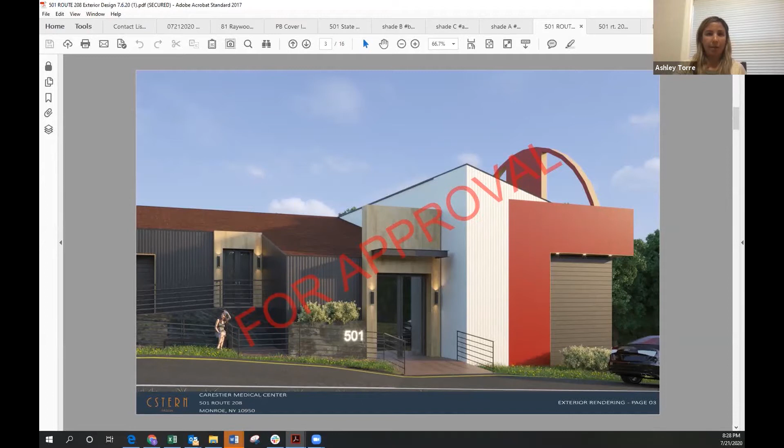I really think the ramp should be addressed as part of the site plan, and they really should be addressed together because the architectural review is related to the site plan application itself. I know this has been before you for some time. When it first came about you were trying to push forward with the ramp, it just took a while to get the information you needed, and now you have that, and also the architectural details you've been asking for. I think again they are really related and should be part of one. You don't want to start splitting applications, because if you do this for one, it's a slippery slope where other people will likely ask to split applications too.

Again, I agree. If you wanted to do that, we'd figure out a way to make it work. My sense is we should do this approval all together. The applicant has been operating under a temporary C of O, and it hasn't affected his ability to continue operation.

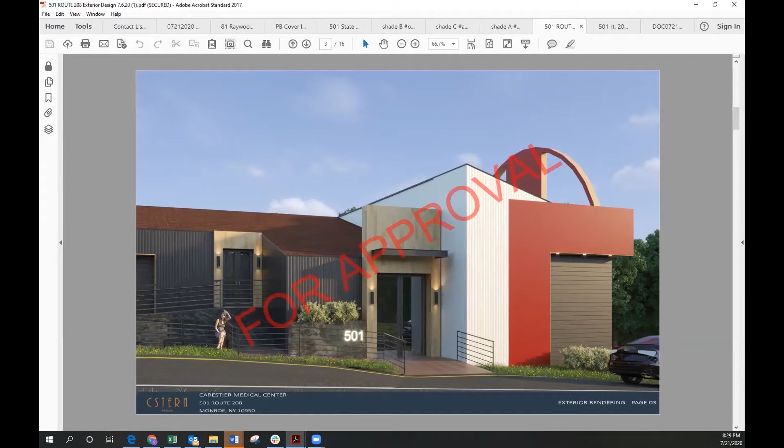I particularly want to see the approval of the ramp and the architecturals tied together, to ensure both get done. And speaking for myself, the sign and the round appearance on the front, I really think that's part of the sign. It's bringing attention to what's being indicated on that identification sign. I think it's all part and parcel of the sign.

I think it exceeds the requirements, and it needs to be modified to get rid of the upper part of the cross and the upper part of the round symbol. Take away the round part, take away the top part of the cross. If you wanted the bottom part to be an accent, that might be okay. But from my perspective, I think this is all part of the sign, and I also don't think it's particularly consistent with our aesthetics.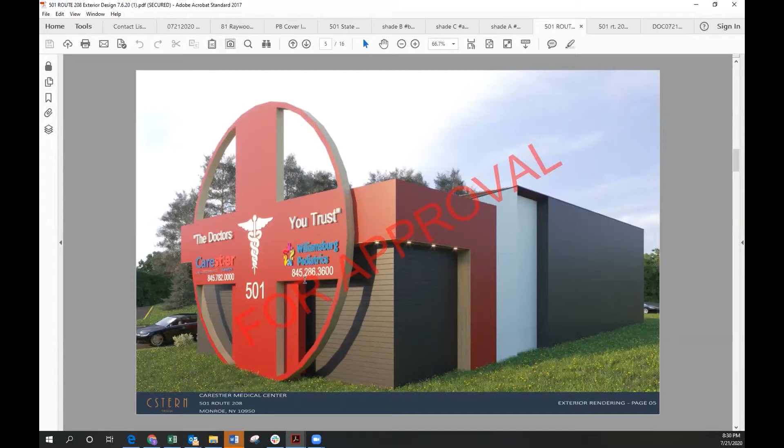Anybody else have anything to say? Yes.

Joel, I think your client can accomplish what he wants with that round structure with the cross in it if it was scaled down to be lower than that section of the building. It's just not in character with the rest of Route 208. Think about the other large office building being completed over there, which is a little more sedate looking, for lack of a better term. This just doesn't really go with anything in the area, and it doesn't go with the office condos it's next to.

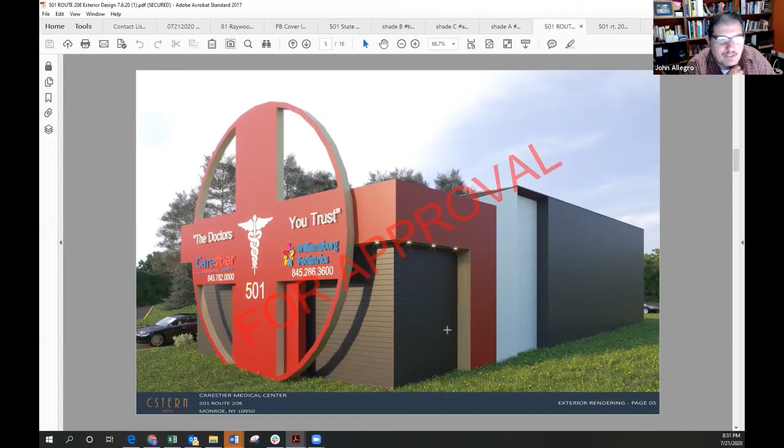And the other thing I think your client should think about is that the sign on the other side of the building is not in harmony with the big red sign in the front. They look kind of hodgepodge. I understand maybe Williamsburg Pediatrics has had this logo for some time, but I think they should go back to the drawing board and come up with something more consistent between the two. It'll look nicer if they do that.

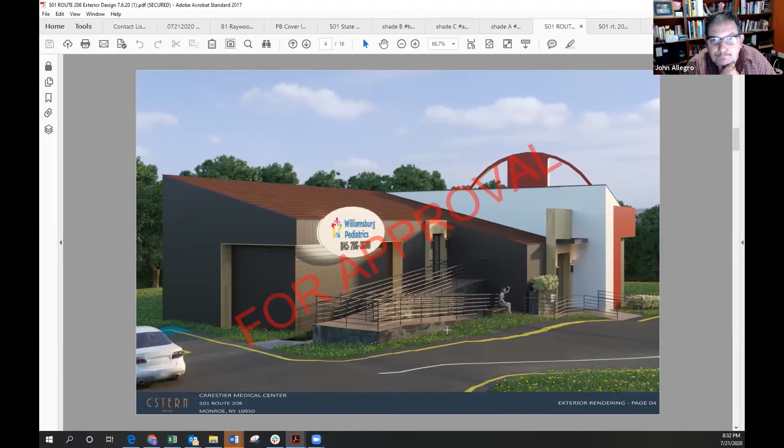I agree with you, John. Anybody else have comments, thoughts?

So I think at this point, Joel, a little work needs to be done on the sign, the design, taking to heart John's comments about consistency. My sense is that we should approve this all together. That's what I would recommend. Board members, would you agree that we should have one resolution approving everything?

Yes, I agree with you, Bonnie. Thank you, Lisa. Jason, did you say something? Yeah, I said I agree.

I also think I recall saying that the Williamsburg pediatric sign should go underneath that ledge, more up against the wall. I think you did, I thought that was something the board thought about. Yeah, so that it's something that would be recessed, as opposed to being on and really kind of going over the roof line. It may not be over the top of the roof line, the ridge, but it's still over the roof, a portion of it. And yeah, I don't think it quite goes well there.

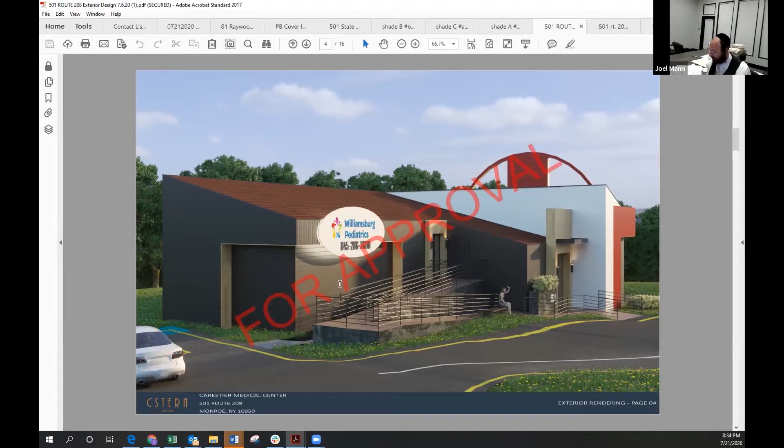Thank you. All right, so our next item on the agenda, I think we've completed discussion of this particular application. So the next item on the agenda would be Kingsville Synagogue, and I believe, Noreen, you said Sol is here for that application?

Yes, I saw his name. Okay, I didn't see David, though. Hello, so I think yes, it's just me. David had another meeting tonight. Okay, is Joel here for this application or not? No, as far as I know Joel's on, he's not on for this project. Okay, all right, so we'll make Joel an attendee then.

Unfortunately, Joel, I apologize, I may have to boot you off the entire meeting. I don't know if there's a way to. Fine, I'm leaving anyway, have a good time. Yeah.

Okay, so Saul, do you want to explain sort of where we are in the process with Kingsville Synagogue? I know you've been off to the ZBA. Yeah, and brief the planning board on what's going on.

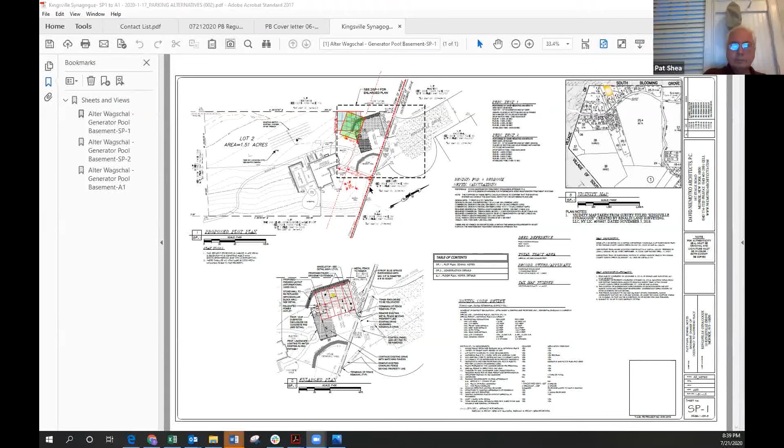So the plan in the top left, that plan would be in green. That's the proposed outline that was recommended. Right now it has 10 spaces, so we'd be suggesting 8 because only 8 is required. So we'd remove those last 2 spaces nearest to the property line, and then there would be a drive that would curve from the existing driveway into a 20-foot drive space, and the dumpster enclosure would be on the side of that. So that's where we'd move everything.

Yeah, on that side, where the cursor is, that would be where we propose the dumpster.

So I can't quite make out this map, but a couple of reactions. One, does our law say you're not allowed in the required front yard or the front yard? Number two, are you sitting on the lot line there, on the side lot line? And is there any prohibition to placing the parking within the side yard?

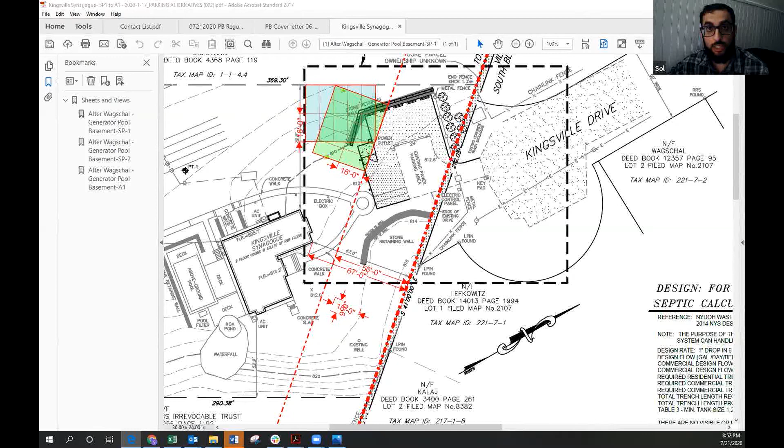Our intention with the stacked parking was to try and prevent a lot of drive aisle space, because it's extra pavement they're frankly not going to use, and a lot of impervious surface. We wanted to avoid adding an elongated driveway—an extra 24 feet wide by 50 feet long driveway—instead of just having the drive shown in the first picture. So that was our intention with stacked parking, to eliminate some of the redundant drive aisles if we could.

As Sean said, it's not really going to be used in that fashion where they're taking up all 8 spaces every single Friday. So if this were deemed acceptable to the majority of the planning board, we certainly don't want this to be precedent setting. The only reason we're even considering it is because this is associated with a gathering place, where in theory people are coming and going, but Lisa has expressed her thoughts about that concept.

Does anybody else have reactions to the stacked parking? Any planning board members?

Just a reminder, this is the gathering place—this is for the synagogue aspect of this development, plus there are residents there. The applicant is trying to find a solution where a variance is not triggered by creation of this parking area. They're trying to stay behind the 50 feet setback line.

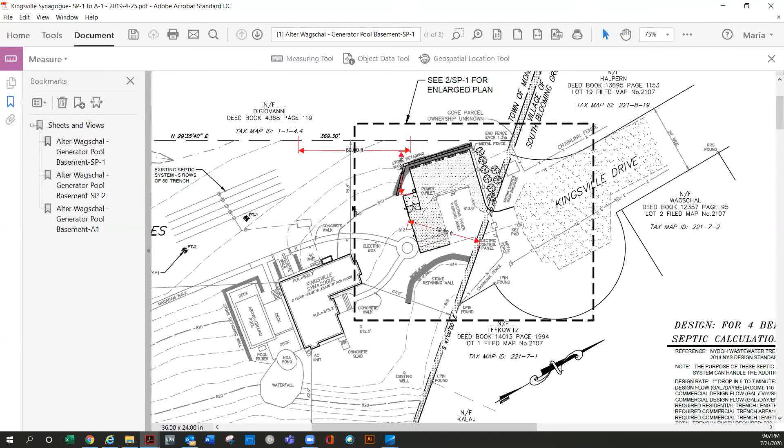This is a 1:30 scale, and those are 2-footers, Bonnie. So that last contour is an 804 contour. So that's a grade of 6 feet that you're changing, by the time you get to actually 8 feet by the time you get to the circle of the concrete walk. So 8 feet, it's pretty steep for a walkway.

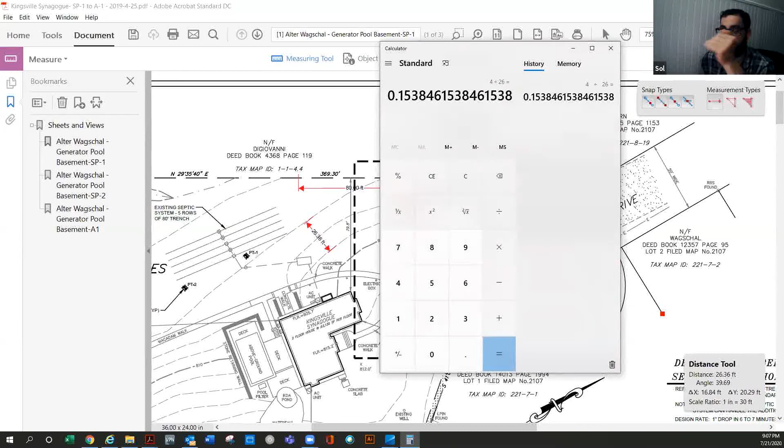And I've been on that site, and you notice that it kind of rolls downhill as you get to the end. So if this is 4 feet, right? Because you said 2-foot contours, so for every contour it's 2 feet. Correct, and we have about a distance of 26. That's about 15% in here.

That's pretty steep. So as you start to get over here, because the contour lines are closer together, the grade increases as you're going, at least in this direction. Here it's flattening out, but it's right in here. We really try to keep the parking spaces at most 5%. If you're really steep, you make it more, but a good stable marker is 5%. So that area we dismissed initially way back when we started this, because of that steepness at the end, coming down out of the house.

Board members, any other thoughts?

I think to keep things linear, doing it along the property line, you're adding a lot of pavement. Because then you have to have the space to back out, and the drive to get to the entrance, the aisle.

It looks like maybe you should reduce the number of parking spots. I mean, we need a certain amount of parking spots based on the number of congregants that are going to be there. Is that where we come up with 10? Correct, 8 is required. I don't know.

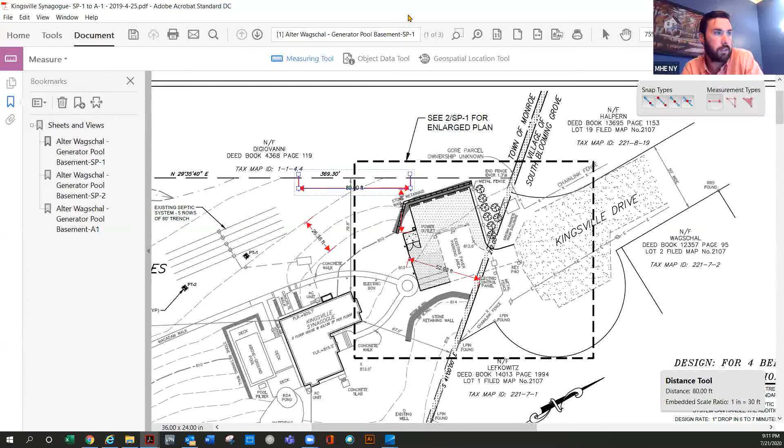Bonnie, I do have a question that ties into what you're talking about: the existing paved area. It's 24 feet wide, so theoretically you could make it into 3 spaces, but I don't know what the planning board thinks about keeping it or removing it. Our intention was to leave it alone, to let it remain, because it's a fairly new paver area.

So I don't know if the planning board would count that towards the spaces. Maybe we'd be able to reduce that - the existing parking would count as 3, and we'd only need 5 to fit somewhere else. I don't know what your thoughts were on that. So you're saying 3 fit right now within what you're showing as existing paver parking area? Yeah, it's 24 feet, but we'd extend it by 3 feet to make each space 9. Okay, so that would constitute 3 existing spaces.

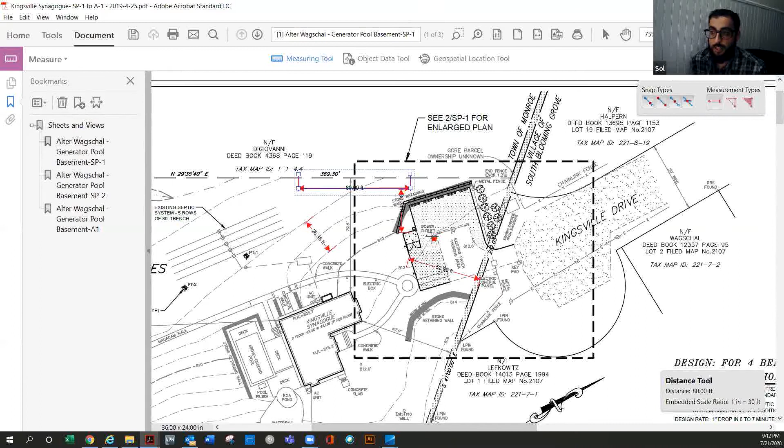I'm gonna send this back to Sean so he can share his version of the map. Hold on a second. I guess the sketch with the yellow highlighted area would be easy, because that has both. Where it says existing paver parking area, that space could serve as 3 spaces, and if we're able to put 5 with a driveway, we'd have 8 and wouldn't require a second stack. But I don't know how the planning board would be okay with that, because we'd still have to expand that existing area by a really small amount.

Just don't extend that curve - you'd also have parking in the front yard setback. Correct, so that runs us back into our original problem. One of the points was for me to ask what your thoughts were on the status of that parking area. Are you gonna require us to remove it, or would you be okay with keeping it? Anything like that?

How would you get to the other 5 spots? Because in the red, it looks like that's a thoroughfare right through where the 3 spots should be. I understand that - I think they would just turn right, coming in this way. Oh I see, straight into those 3 spaces. We'd make sure the aisle is kind of perpendicular, and once those 3 spaces end, it would turn into the new paved area.

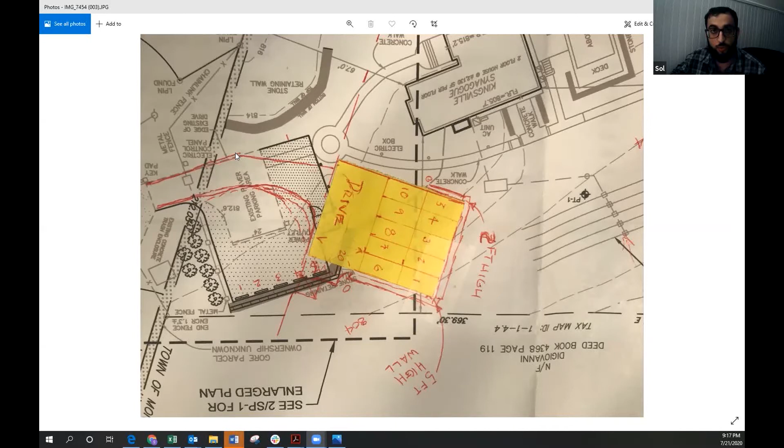Bonnie, let me ask you this. Will we still require a variance in that way? I'm not sure, because the question would be, are those spaces considered pre-existing, non-conforming? Is that a pre-existing non-conforming area?

I would argue that if you needed to expand it at all -- I thought Sol might have said you had to expand it by at least 3 feet. So even if it was pre-existing non-conforming, it would be an expansion of that, so it would require a variance, though a much smaller one, since you'd only need that 3-foot sliver.

So that 3-foot expansion would still require the variance. I think it's reasonable to explore this alternative, because you're working with the existing paved area and accommodating additional spaces in a manner that's not stacked, which some board members had concern about. I don't have an issue pursuing this alternative. Does anybody feel strongly against it?

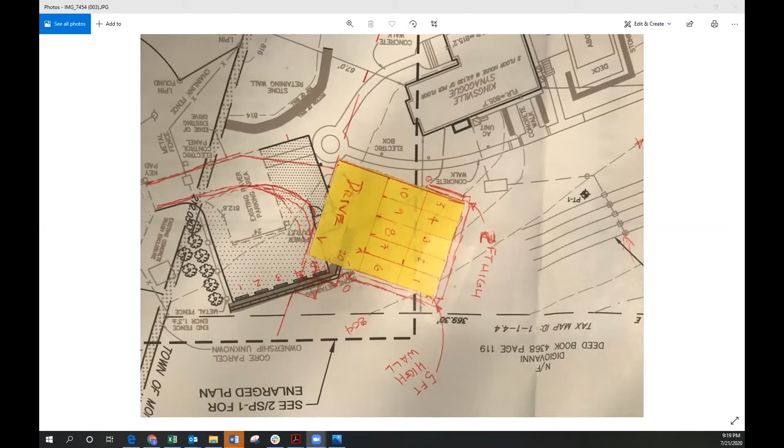No, I see John shaking his head. I can't see everybody -- Pat already said he was okay. Jeff, you okay with that?

You're muted, Jeff. Yeah, I'm off mute. It wouldn't be my first choice, the hybrid alternative, but I don't feel so strongly about it, particularly since it seems like the majority of the board would either prefer that or at least like to consider that option.

Anybody else? Jason, did you comment? I don't really have a preference on which way the applicant would prefer. Like I said, my personal preference is to avoid the stacked parking, but...

Okay. So Sol, do you think you have some direction to go back to the ZBA with? Yeah, absolutely. I'll let the client know, and we'll go from there, because it looks like with the hybrid we'd still require that variance, but it'd be really small.

So if we decide to go through with that, I think it'd be best for everyone, because this way we'd be able to avoid a lot of impact on the site, which is really what I'm trying to keep to a minimum -- adding all this new driveway and digging up the existing sidewalk, because it gets pretty expensive. So yeah, I have a lot of direction.

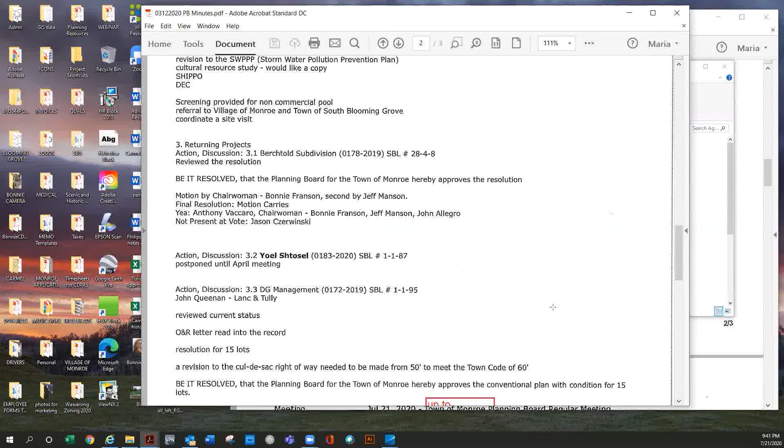Okay, I'll fix that. Did anybody have any other comments? Any other items? No items. Okay, so with that, I am going to make a motion that we approve the 3/12/2020 minutes of the Town of Monroe Planning Board Workshop. May I have a second? I'll second that. All right, all in favor? Aye. Aye. Aye. Any not in favor? And then any abstentions?

I'll abstain, I wasn't there. Okay, thank you. I'll abstain as well because I wasn't there. All right, so next is, you don't have that one. I realized I never sent it, the March 30th. Yeah, I never forwarded them out. Okay, so that's a wrap.

So with that, I'll make a motion that we adjourn this meeting unless anybody feels strongly about anything we need to discuss. May I have a second? So moved. All in favor? Aye. Aye. Aye.